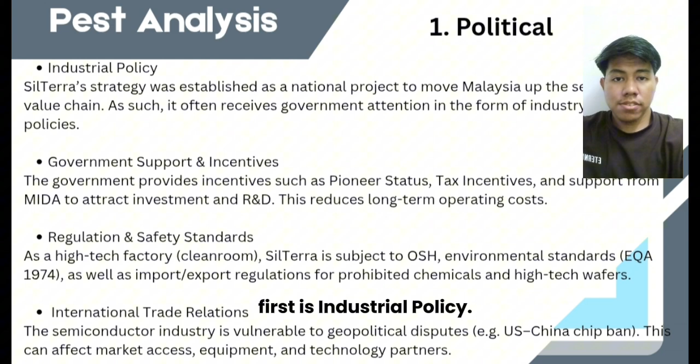Next is the PEST analysis. First, industrial policy: SilTerra's strategy was established as a national project to move Malaysia up the semiconductor value chain. As such, it often receives government attention in the form of industry support policies. Government support and incentives: the government provides incentives such as pioneer status, tax incentives, and support from MIDA to attract investment and R&D. This reduces long-term operating costs.

Next is regulation and safety standards. As a high-tech factory clean room, SilTerra is subject to OSH environmental standards under EQA 1974, as well as export regulations for prohibited chemicals and high-tech. International trade relations: the semiconductor industry is vulnerable to geopolitical disputes such as the China chip ban. This can affect market access, equipment, and technology partners.

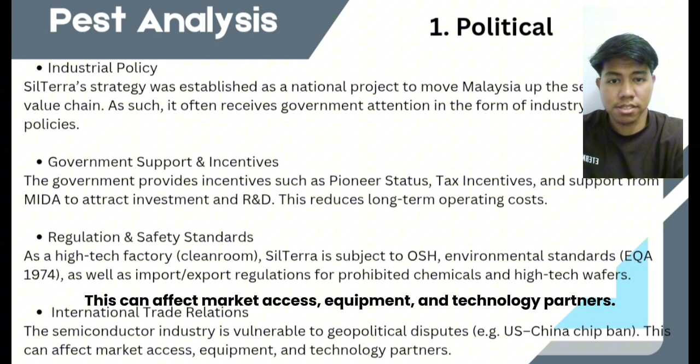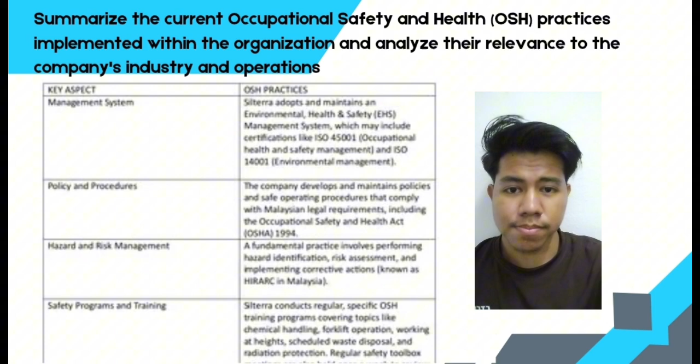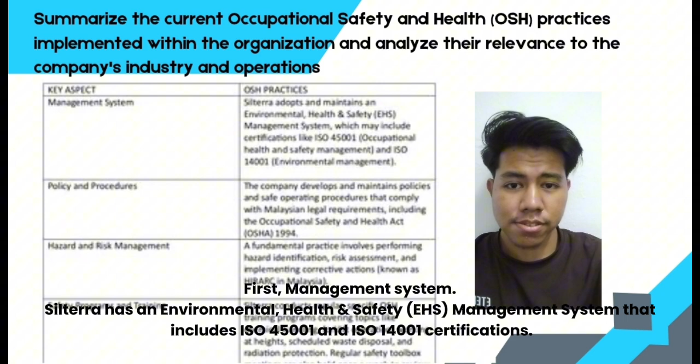Next, let me summarize the current occupational safety and health practices implemented within the organization and analyze their relevance to the company's industry and operations. First, management system: SilTerra has an environmental health and safety management system that includes ISO certifications. Policy procedures: the company's OSH practice complies with Malaysian legal requirements, including the Occupational Safety and Health Act (OSHA) 1994.

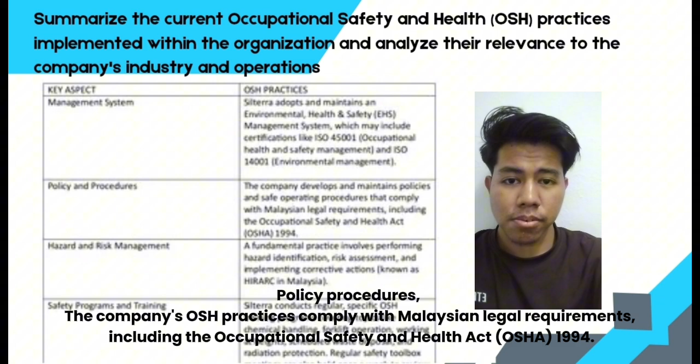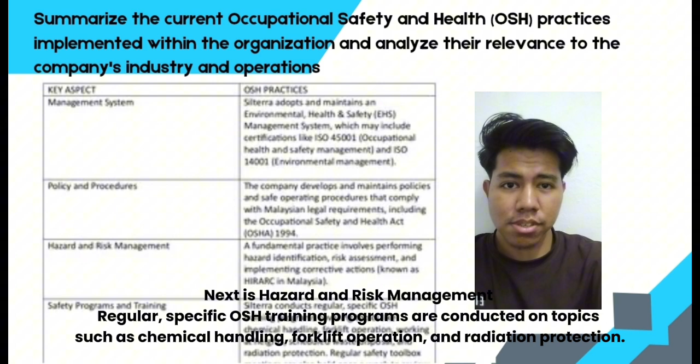Next, hazard and risk management: specific OSH training programs are conducted on topics such as chemical handling, forklift operation, and radiation protection. Staying in the Zone program: this program is used for staff to check their health, tools, area, and team member safety before starting work.

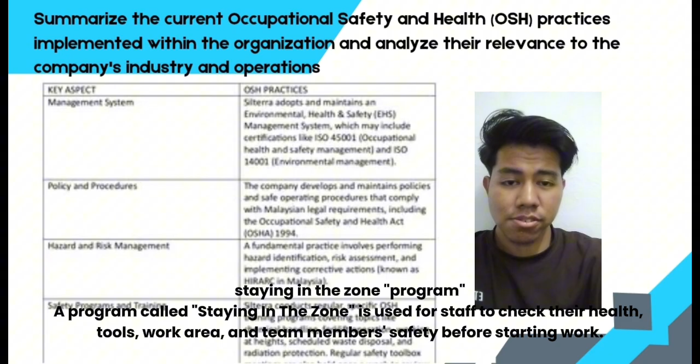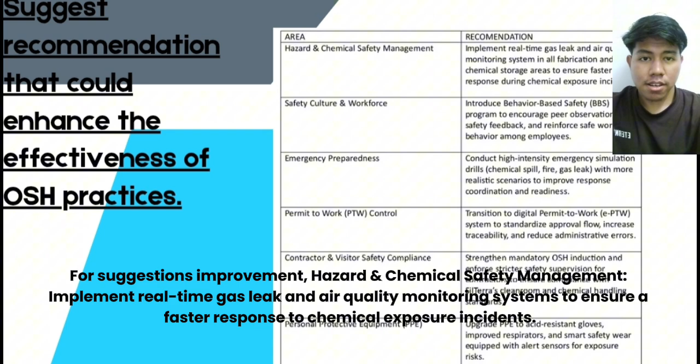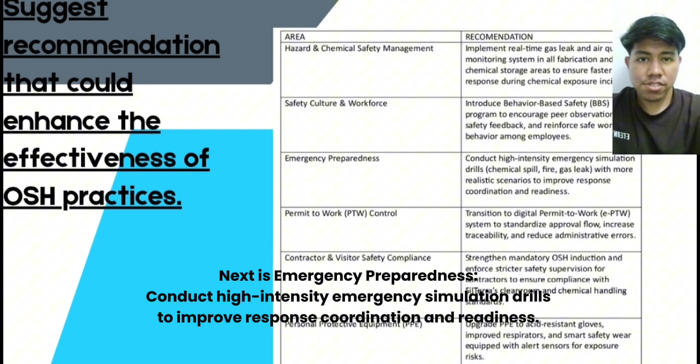For suggested improvement: first, hazard and chemical safety management - implement a real-time gas leak and air quality monitoring system to ensure a faster response to chemical exposure incidents. Next, emergency preparedness - conduct high-intensity emergency simulation drills to improve response coordination and readiness. Next, safety culture and workforce - introduce a behavior-based safety (BBS) program to encourage peer observation and safety feedback.

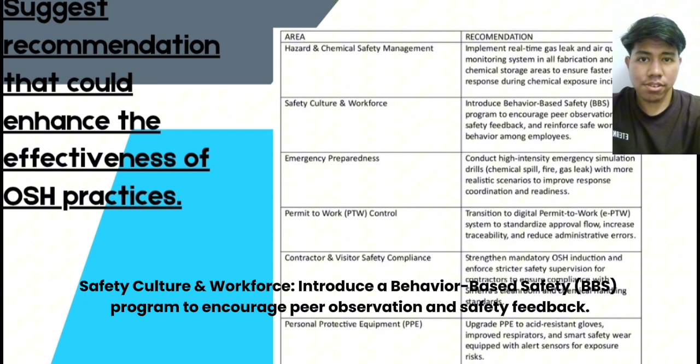Next is personal protective equipment (PPE). Upgrade PPE to include acid-resistant gloves, improved respirators, and smart safety wear with alert sensors.

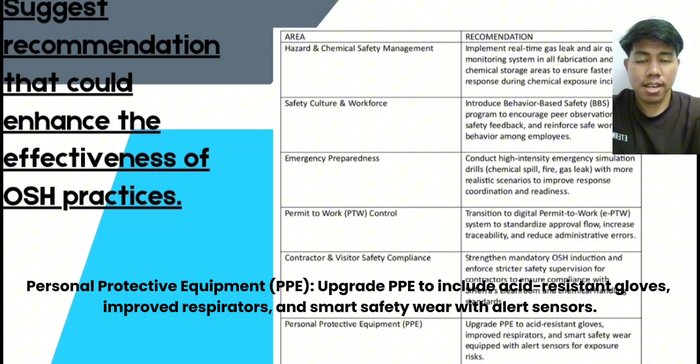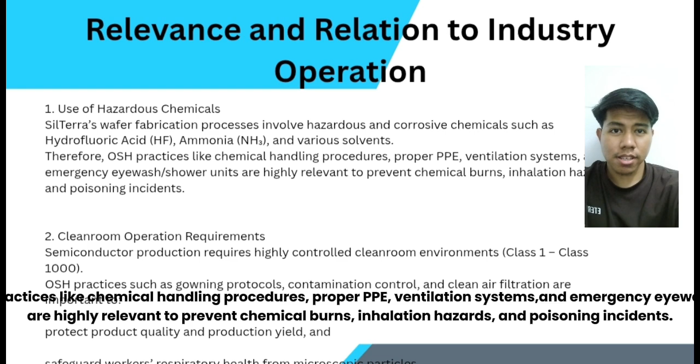Next is relevance to industry operations. First, use of hazardous chemicals: SilTerra's wafer fabrication processes involve hazardous and corrosive chemicals such as hydrofluoric acid, ammonia, and various solvents. Therefore, OSH practices like chemical handling procedures, proper PPE, ventilation systems, and emergency eyewash shower units are highly relevant to prevent chemical burns, inhalation hazards, and poisoning incidents.

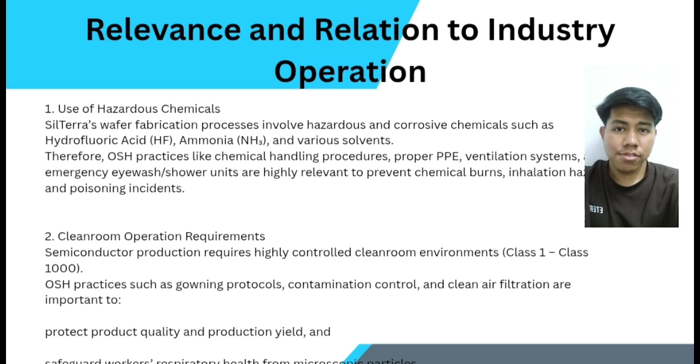Second, clean room operation requirements: semiconductor production requires a highly controlled clean room environment.

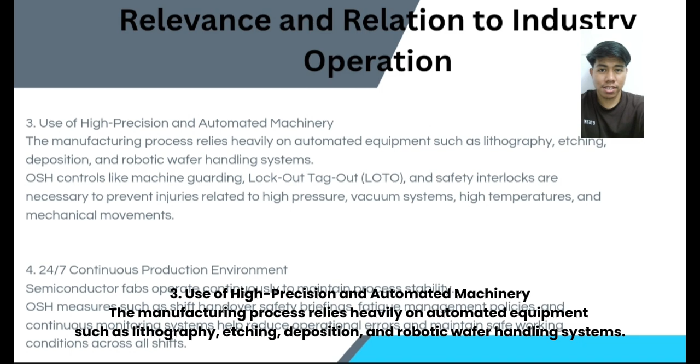Next is use of high precision and automated machinery. The manufacturing process relies heavily on automated equipment such as lithography, etching, deposition, and robotic wafer handling systems. Controls like machine guarding, lockout-tagout (LOTO), and safety interlocks are necessary to prevent injuries related to high pressure, vacuum systems, high temperatures, and mechanical movement.

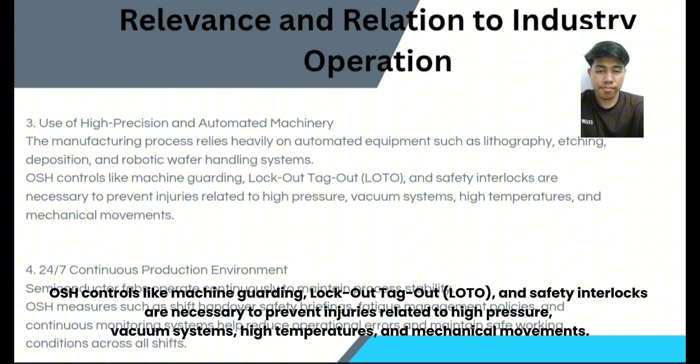Fourth, 24-hour continuous production: semiconductor fabs operate continuously to maintain process stability. OSH measures such as shift handover, safety briefings, fatigue management policies, and continuous monitoring systems help reduce operational errors and maintain safe working conditions across all shifts.

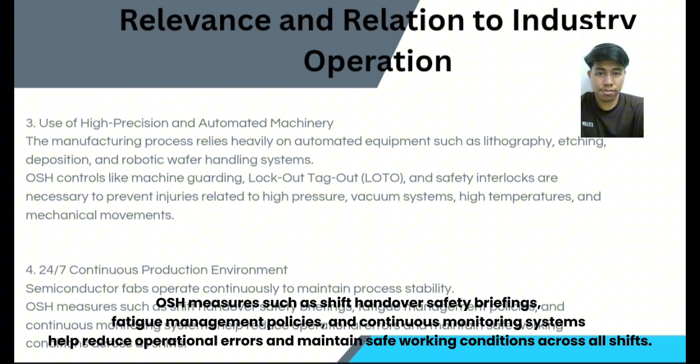And lastly, for suggested improvement, I suggest first, occupational safety and health (OSH) training standards - introduce scenario-based simulation training, VR headset simulation for clean room emergency situations.

Second, clean room energy efficiency: clean rooms use high energy HVAC and constant air circulation. Adopt an energy optimization system with automatic air change rate adjustment based on particle monitoring.